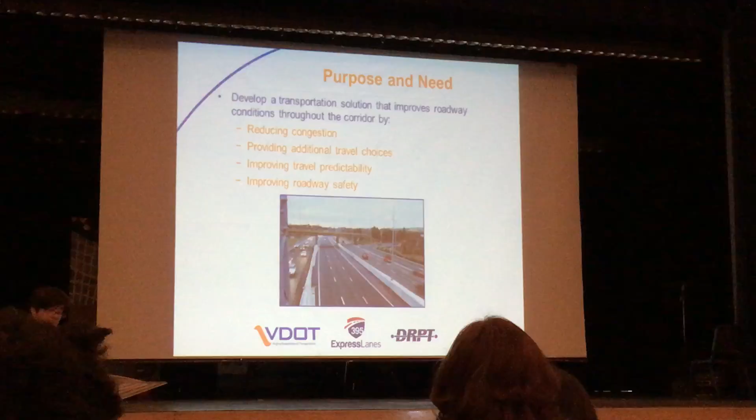Access and capacity, and our goal really is to move more people in the corridor. The purpose and need of the project is to come up with and develop a transportation solution that will improve the conditions throughout the corridor by reducing congestion, adding additional travel choices, improving travel predictability, and improving roadway safety.

To give you a little feel for the background of the project, this is following a comprehensive agreement signed between the Virginia Department of Transportation and 95 Express Lanes, sometimes known as Transurban. They're part of that partnership, and that allowed construction of the 95 express lanes out there today, 29 miles of express lanes.

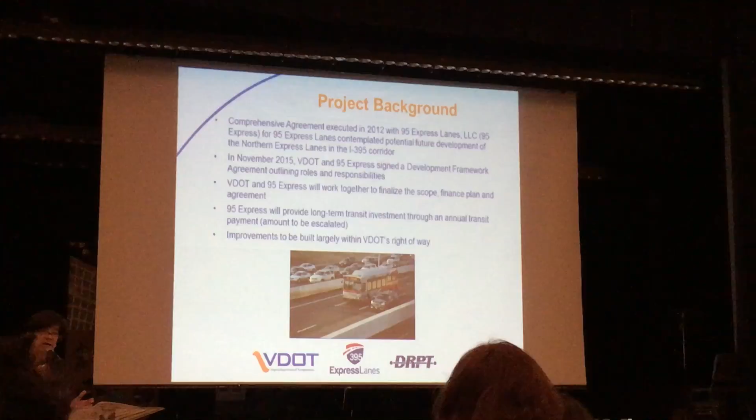That comprehensive agreement also contemplated a future extension of the express lanes north into the vicinity of the Eads Interchange. So last year in November of 2015, the Department of Transportation and 95 Express Lanes entered into a framework agreement. This outlines some broad understandings and talks about working together to finalize a scope of the project, a finance plan, and then a final agreement.

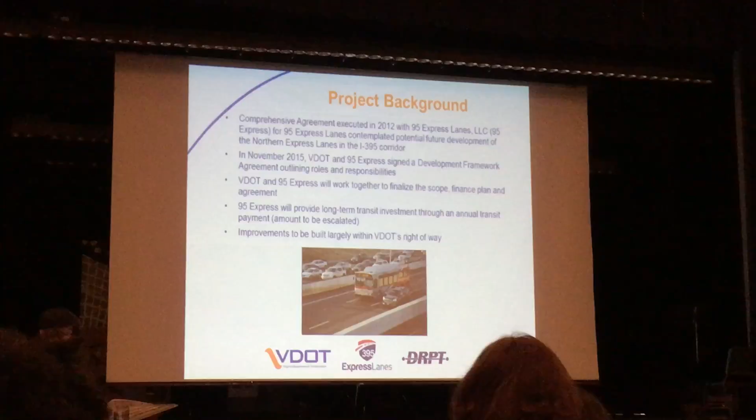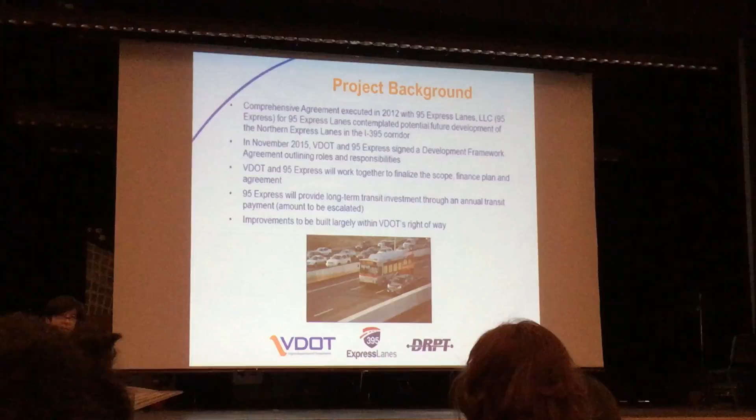One of the things in that framework agreement is a commitment to provide a long-term transit investment, through an annual transit payment that would be escalated annually throughout the whole term of the 95 Express Lanes contract. That term, when originally signed, was about 73 years, so from the time this project is implemented, those transit payments will be made for about a 70-year term.

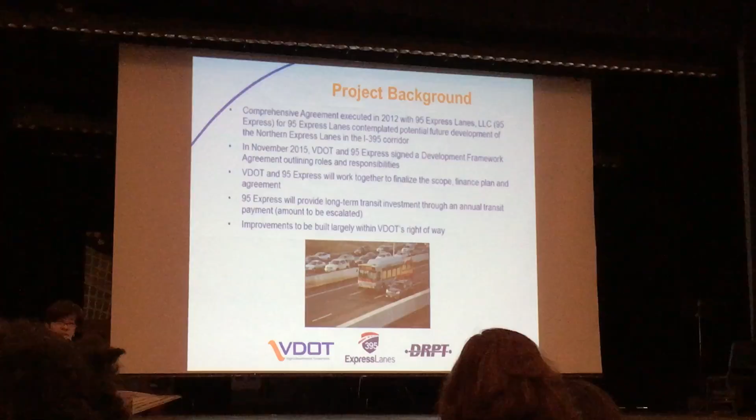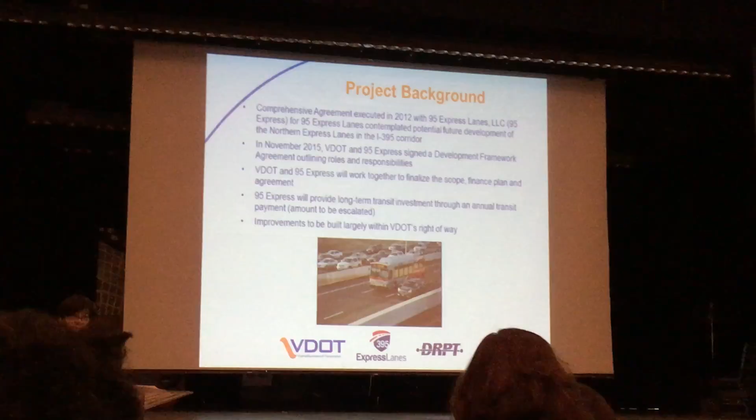The improvements proposed are largely going to be built within the existing right-of-way, mostly confined to the area where the HOV lanes operate today within the broader 395 corridor. The project scope is to expand and convert the existing 2 HOV lanes to 3 lanes, converting them from HOV to what we call HOT, or high occupancy toll lanes.

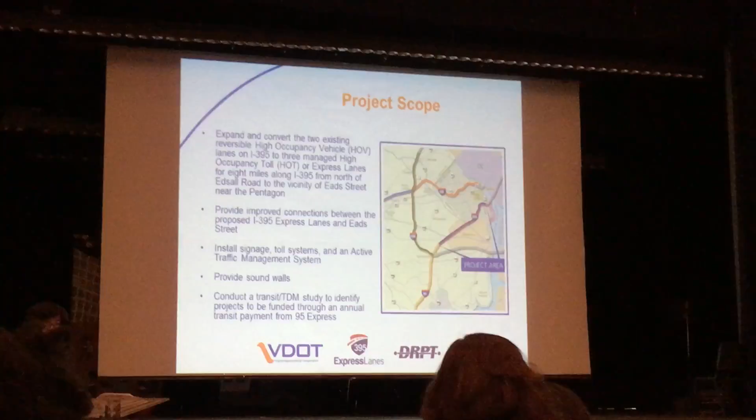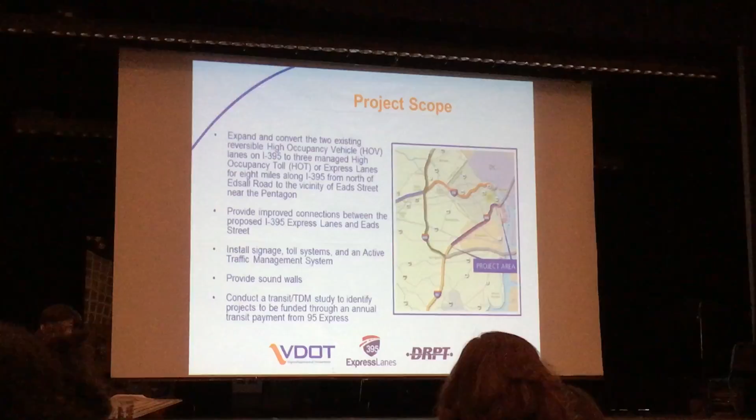Similar to the 95 express lanes, these tolls will apply throughout the day whenever the lanes are operated, with variable pricing so that speed limits are maintained to ensure free travel flow for those on the lanes and for buses, transit, and HOV drivers.

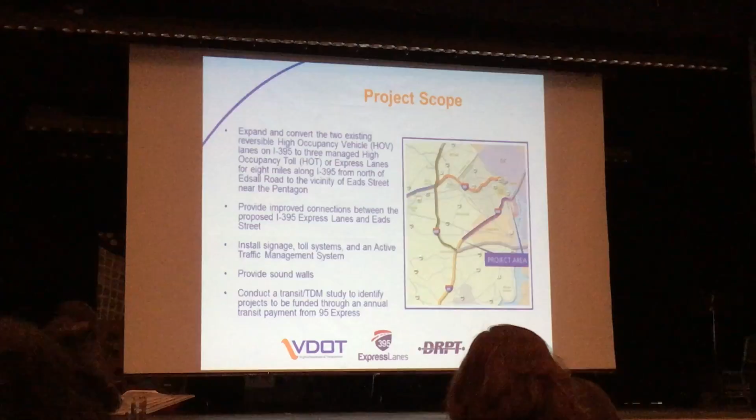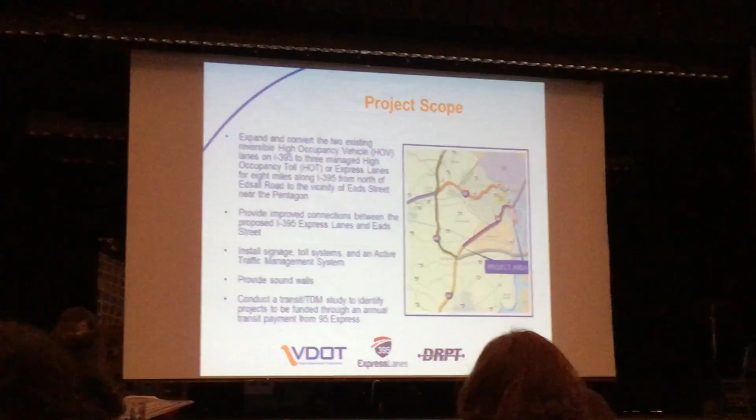We'll also be looking at improving the connections at Eads Street, which has been a focus of the team so far. We'll be installing signage related to the tolling, and there will be an active traffic management system with dynamic message boards to help with safety and advise motorists of conditions on the roadway.

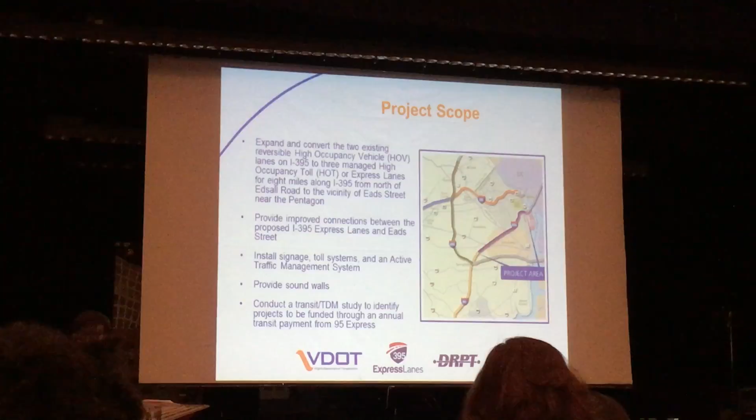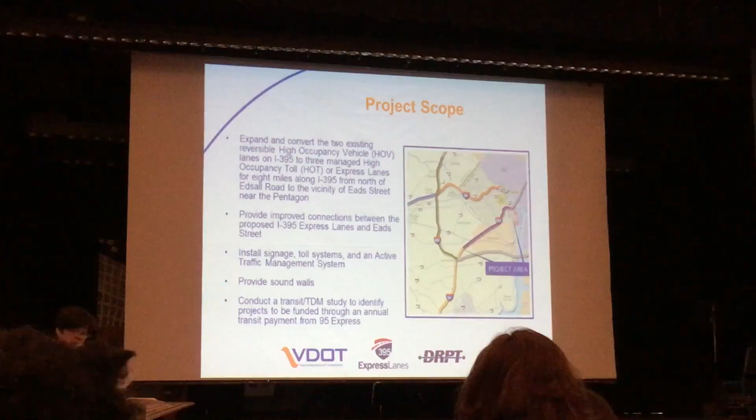Sound walls are another part of our environmental assessment, looking at noise impacts in the corridor. Based on our earlier studies, we anticipate a number of sound walls will be considered during preliminary and final design. We'll also be doing a transit and traffic demand management study throughout this year to identify projects eligible to use funding from the toll payments.

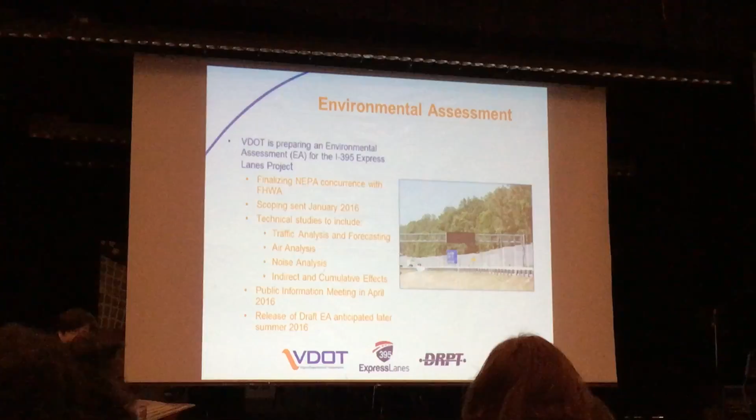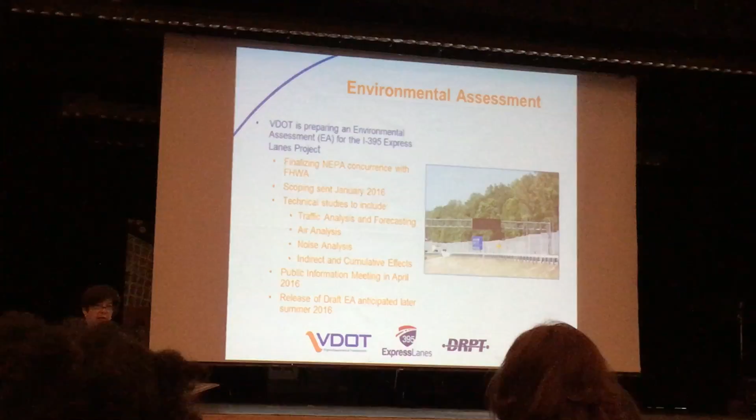We're working on initiating an environmental assessment. FHWA is our federal partner, and they've agreed that's the level of document we're moving forward with. We sent out scoping letters, advising all of our coordinating agencies about the scope of the project.

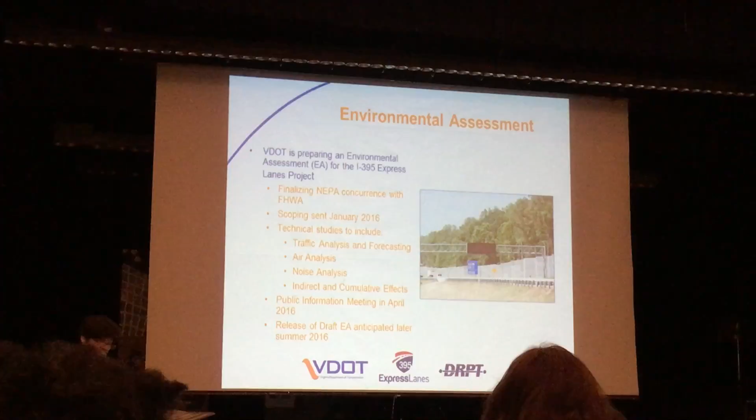We've started to initiate our technical studies looking at traffic. That traffic data will inform our air analysis, our noise analysis, and then we'll be looking at all the other environmental impacts along the corridor in addition to those.

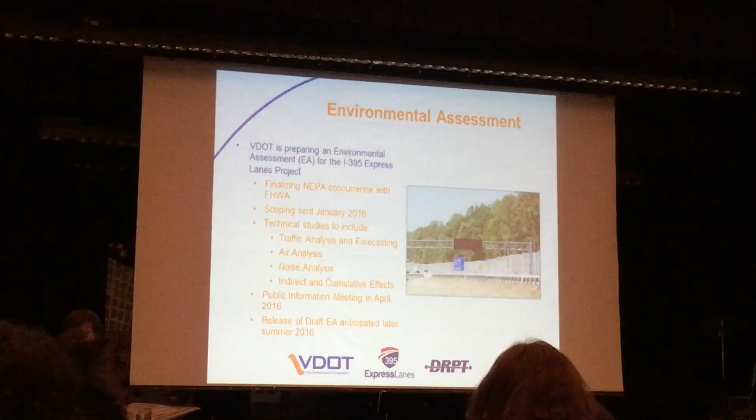We have our public information meeting tonight, and we had one on Monday night. We're anticipating a draft environmental assessment available for the public to review and comment on in August of this year.

One thing in this area of the corridor is there's quite a bit of double-faced guardrail. That will all be converted to a concrete barrier, which is a safer, more effective separation between the two systems.

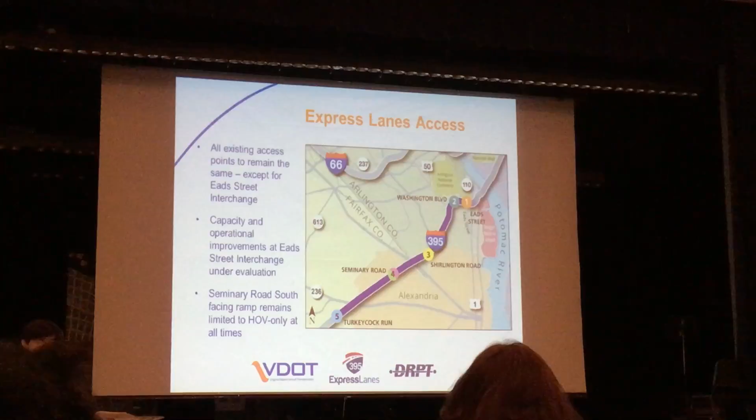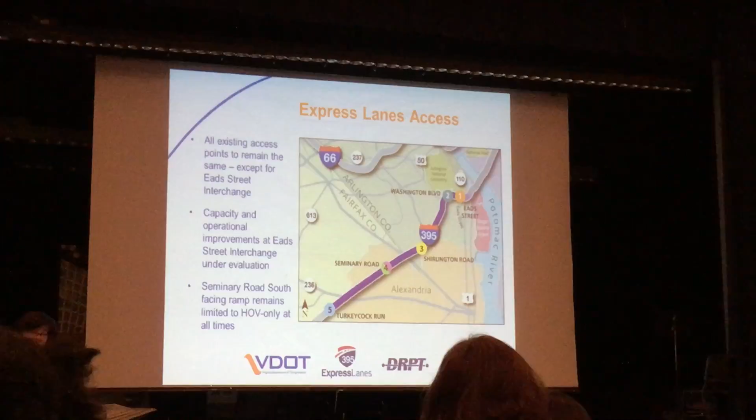In terms of express lanes access, once the system is converted to HOT, all of the places where you currently access the HOV lanes will be converted to HOT access. There will be toll gantries and signage about what the tolls would be, and those access points won't really be changed other than being converted, with added signage.

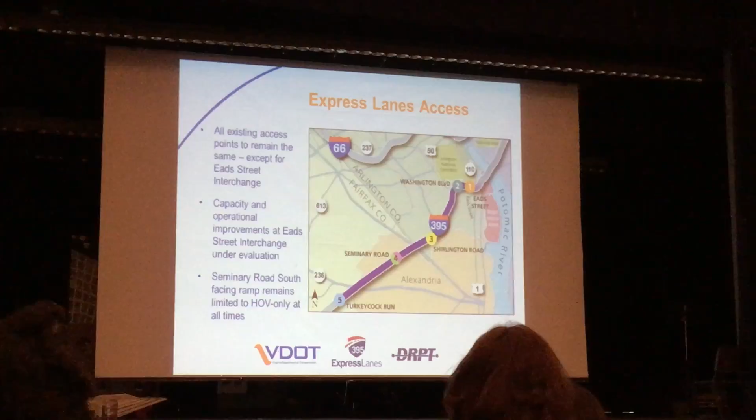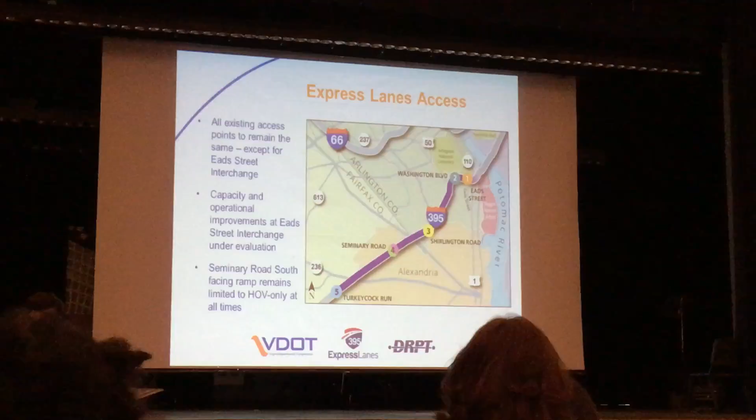The one place that is not true is at the new ramp that just opened in January. That ramp comes from the south and allows people to exit the HOV lanes at Seminary Road. That ramp will remain HOV and transit use at all times, so even in off-peak periods, to access that ramp you would need to be HOV3 or in a bus or van pool.

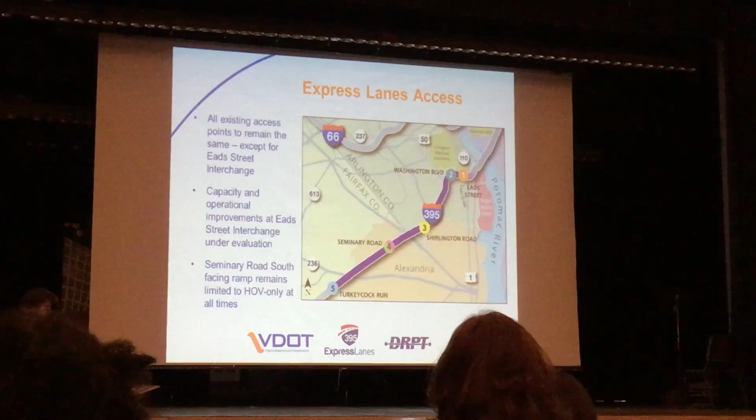These maps are at the back, and I would encourage you to go look at them, especially if there's a specific area of interest. We have people at the back who can answer questions. I'm just going to walk through these fairly quickly now.

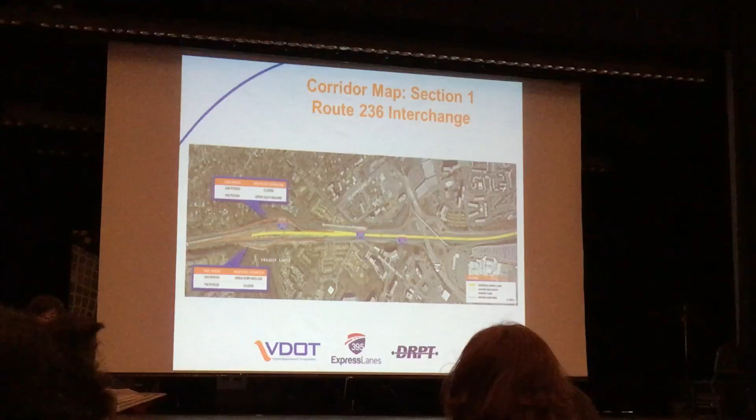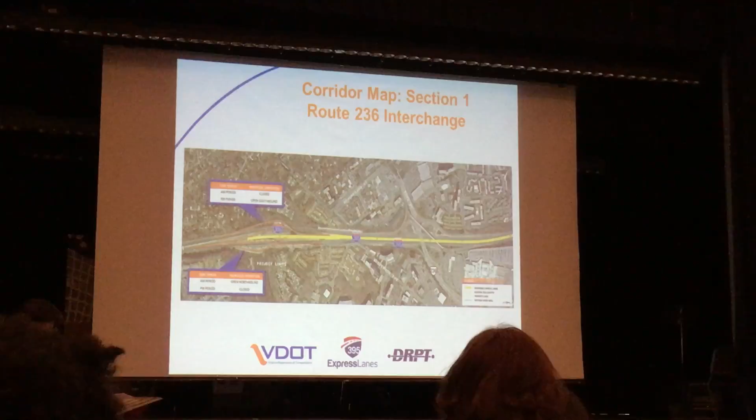I know you can't really see the detail, but just to give a broad overview of the project, starting from the south and moving north. Here you can see the Duke Street interchange. In this area, there's really no change to the HOV to HOT access other than just converting it at this location.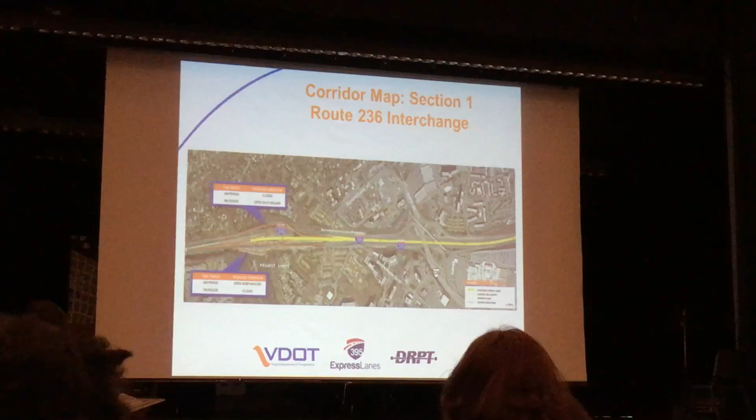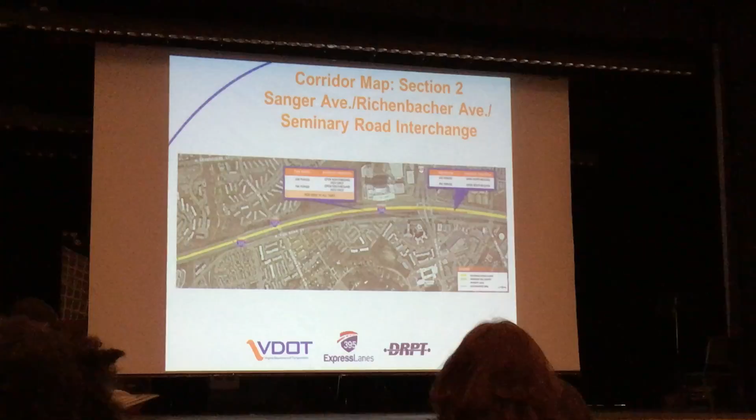This map shows the Seminary Interchange, which is where we are today, or close by. As mentioned, the ramps going to and from DC will convert to HOT, but the ramp at Seminary would remain HOV.

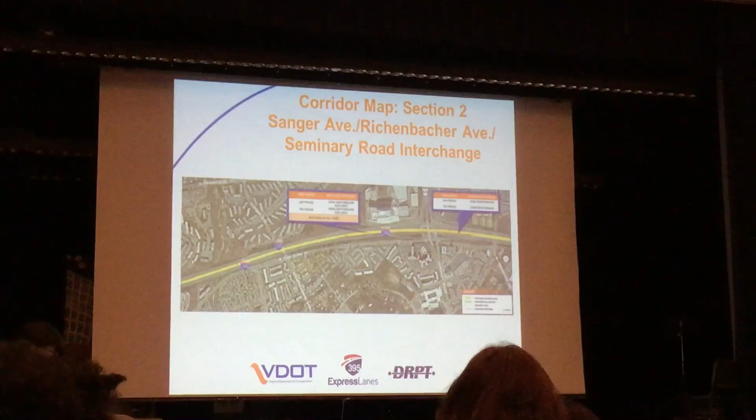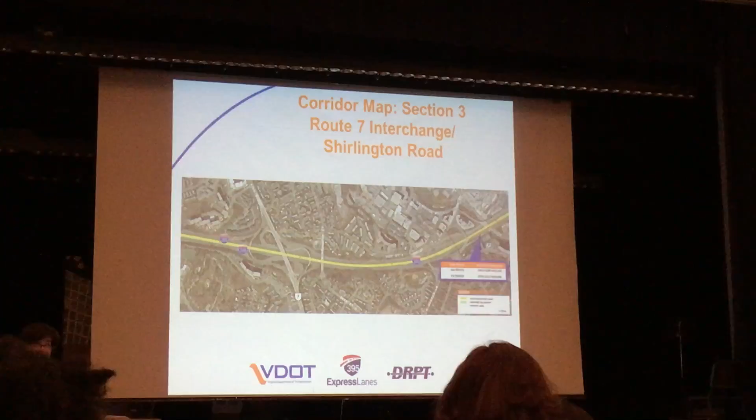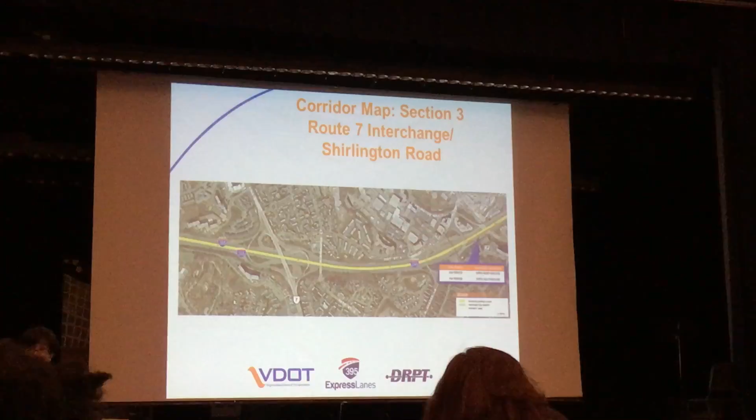This shows Route 7 and then Shirlington. You might recall back in the 2009 to 2011 time period, when this project was being studied previously, there was a lot of discussion around the Shirlington Interchange and adding new access here. It was a very controversial, much discussed access point. We are not proposing any change—there will not be new access at this interchange. That's one of the big differences from what you might have seen previously if you were involved in that discussion back then.

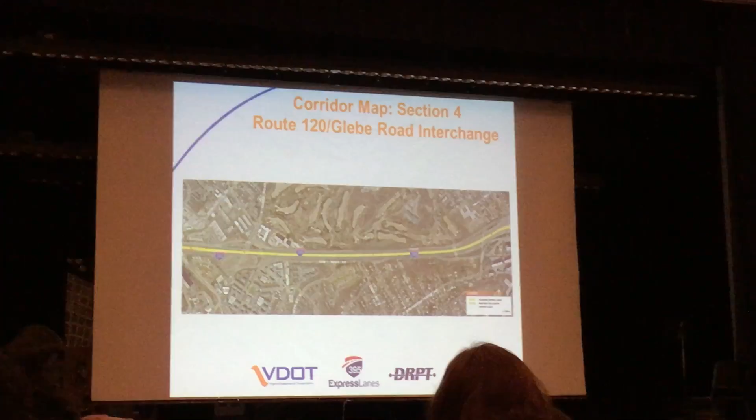And here we see Glebe Road. Again, no changes here. Then we get to the Pentagon and the Eads Street interchange.

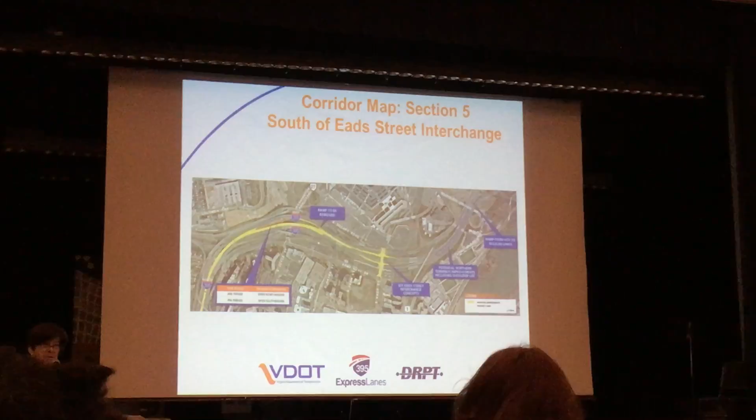We are rolling this out tonight—we did this Monday night as well. This is kind of the first time we're showing the public some of our thoughts about what could happen at the Eads Street interchange and what we think would be an improvement.

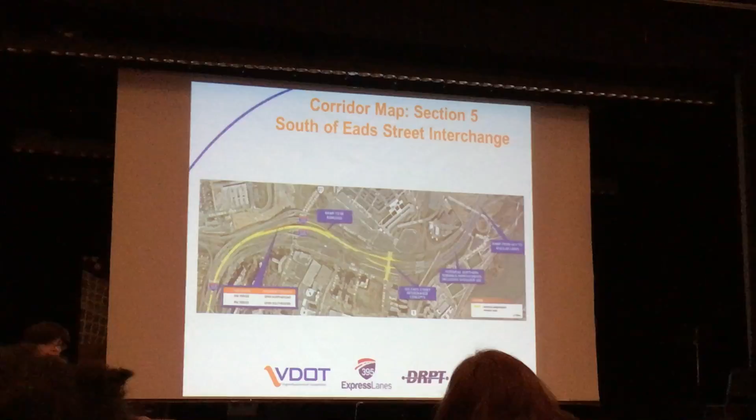Basically, we're looking at trying to maximize the use of the existing ramps that are already there today by reversing some of the movements during the peak periods. Today, this ramp that I'm pointing to is a reversible, or one-way ramp that always functions in the southbound direction.

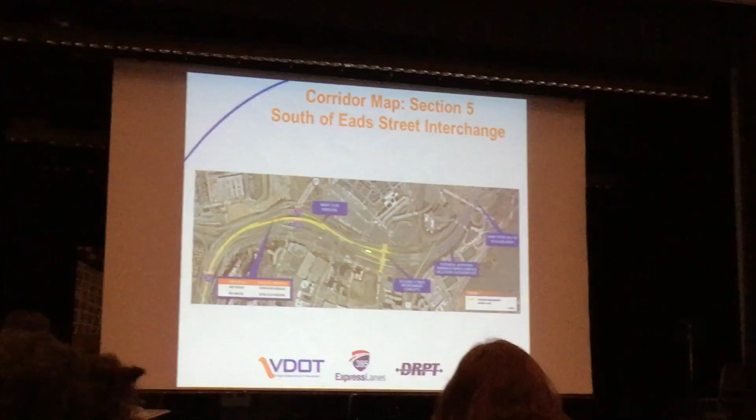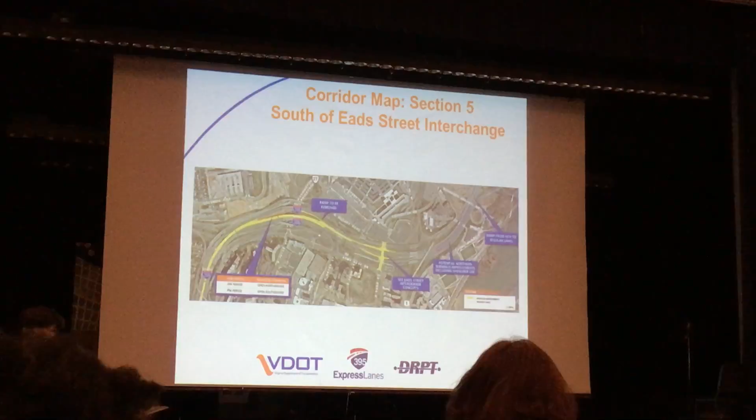What we're talking about doing is shifting the point where the system changes from reversible to both-way. We're going to shift that to the north and make use of that ramp in the PM peak period and in the AM peak period to reverse that direction.

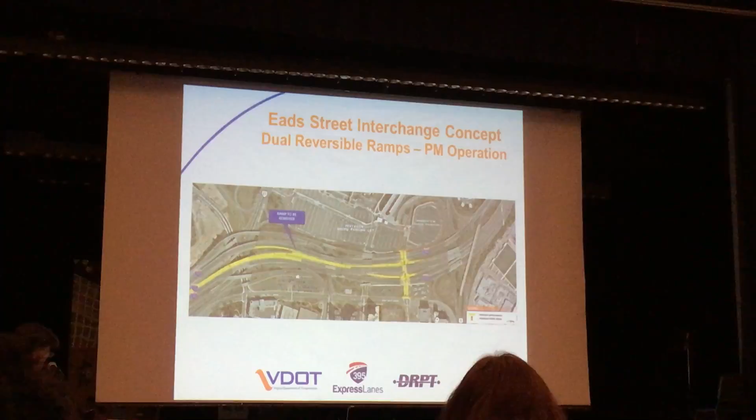This just shows the PM operation, and there's another slide that shows the operation in the evening. I would point out also at this location that one of the keys to all of this is that the Pentagon Reservation is a very key area for transit in the corridor.

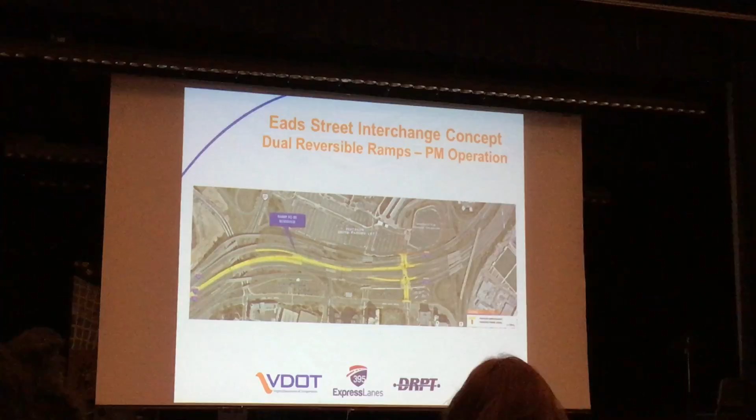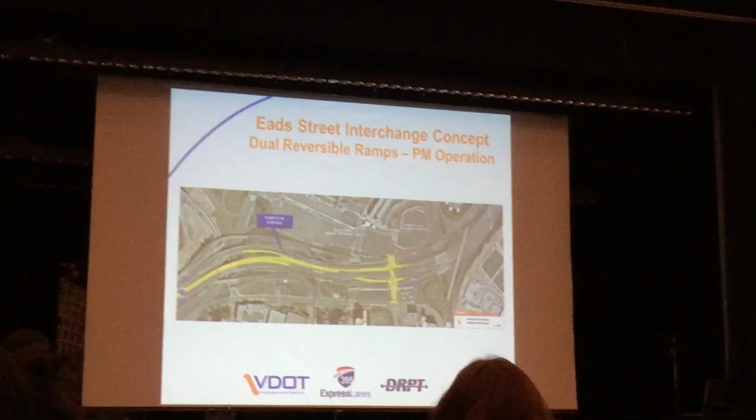There are many buses, carpools, and van pools getting into that area to access the metro station on the Pentagon property. So we've been coordinating very closely with the Pentagon, also working with our partners at Arlington County and others, to talk about what kind of changes might be needed to make this whole area function better.

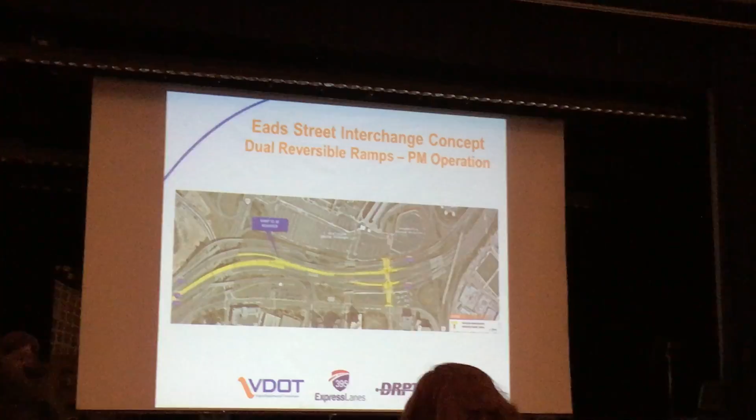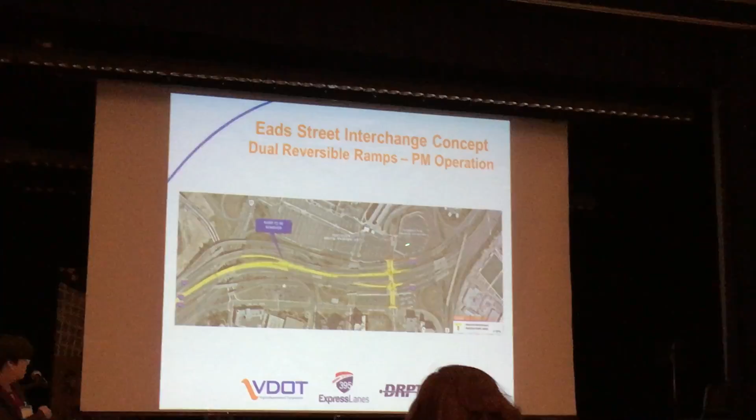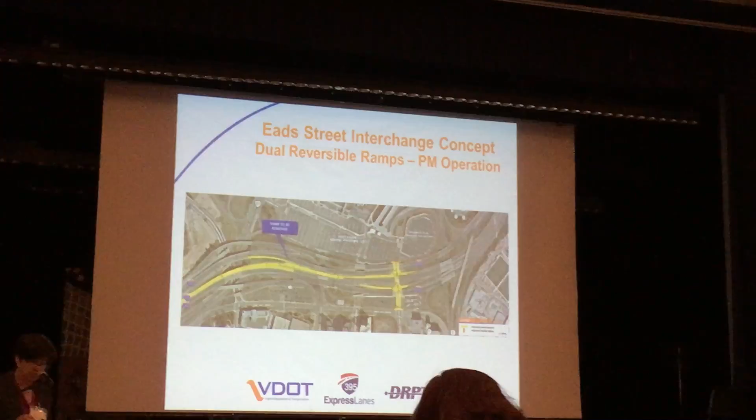Some of those include adjustments to traffic circulation and traffic on the Pentagon property. We've been working closely with them, and you can see in these slides that we are proposing a series of coordinated traffic signals, adjusting traffic flow to help both buses and carpoolers get in and out of that area more easily than they do today. The hope is that this would free up much-needed capacity on 395.

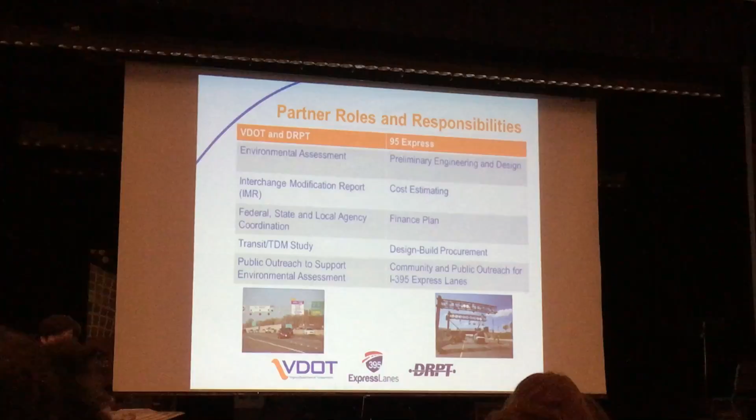One thing to talk about in the framework agreement: there are responsibilities on the public side of the fence, so to speak, and other responsibilities that the 95 Express teams will have. On the left here, you can see VDOT and DRPT responsibilities.

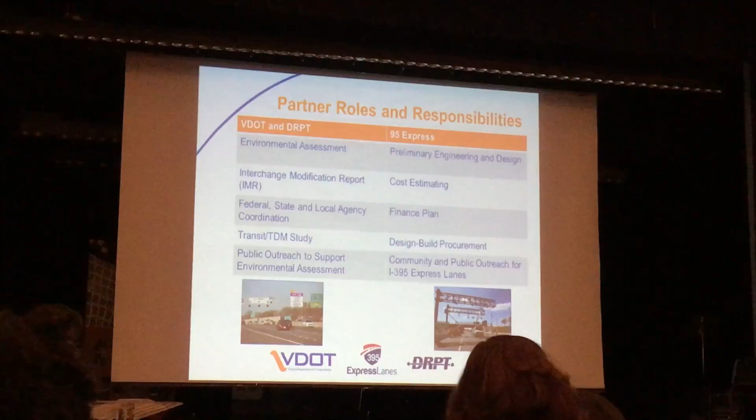We are working on the environmental assessment, which is an effort that we are leading. We are also working on the interchange modification report, which is basically a summary of all the traffic impacts of doing the project. We look at both how traffic will flow on 395, as well as areas to the north and south of our proposed improvements.

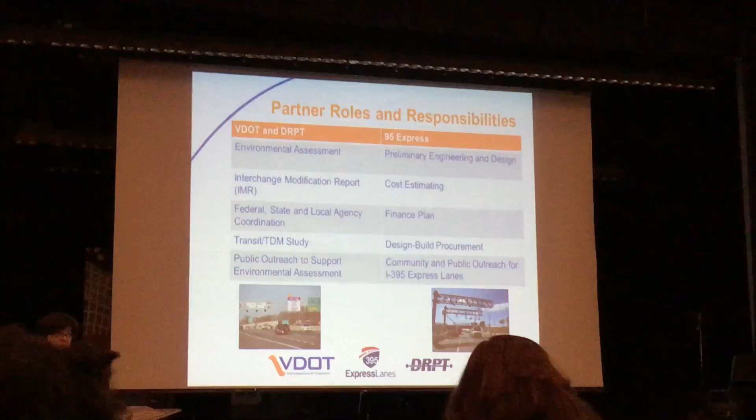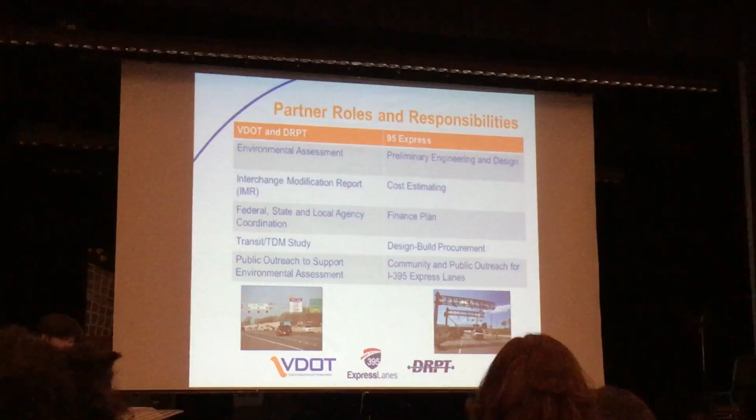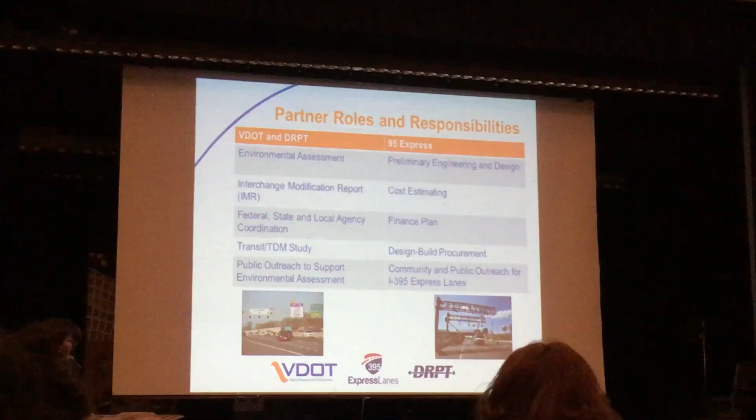And then we also look at the surrounding roadway networks to understand how those might be impacted by the project. We're also coordinating with federal, state, and local agencies. We're doing the transit study, and our role, like it is here tonight, is to do public outreach to make sure the public has an opportunity to provide input, understand what the project is about, and make sure your voice is heard in the project development.

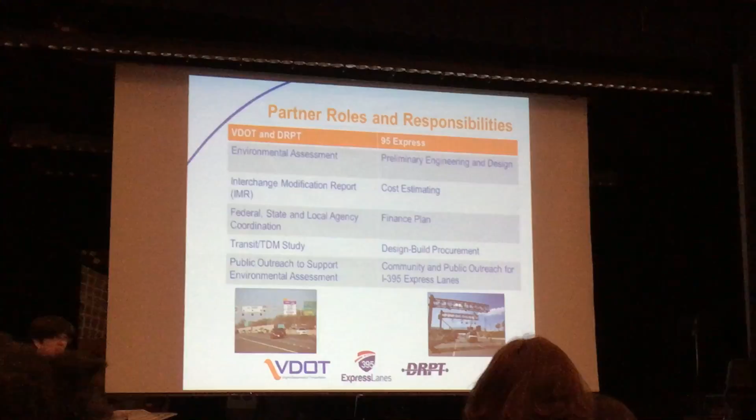95 Express partners are responsible for preliminary engineering and design. They're also doing cost estimating for the project, and the department is doing our own independent estimate as well. We don't just take their word for it; we look and compare with our own costs.

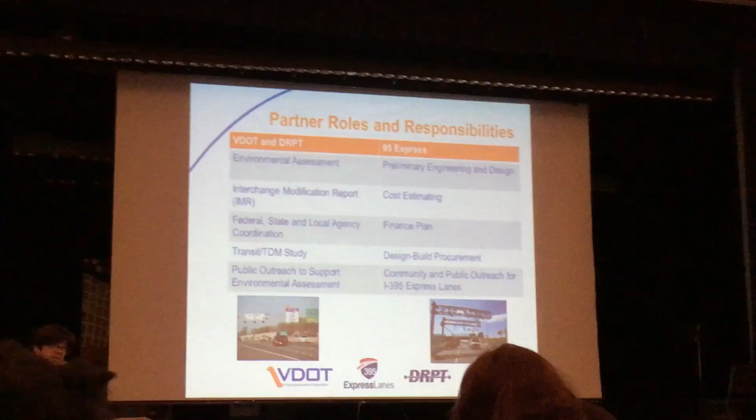They will be responsible to come up with a finance plan, meaning how to pay for the design, construction, and implementation of the whole project. They will also be doing a design-build procurement, hiring a contractor responsible for design and construction of the project. And then they also are responsible for community outreach.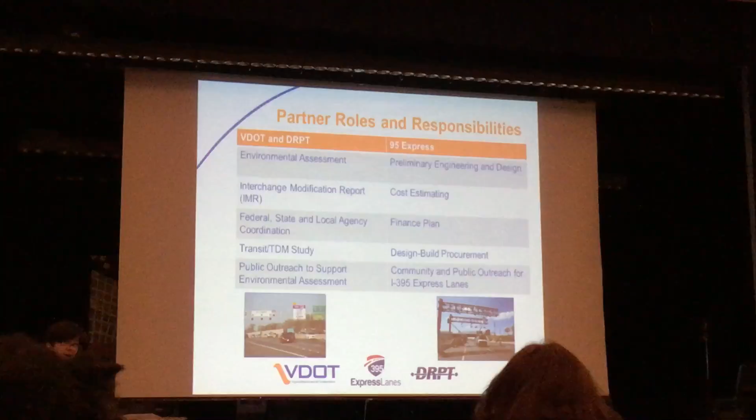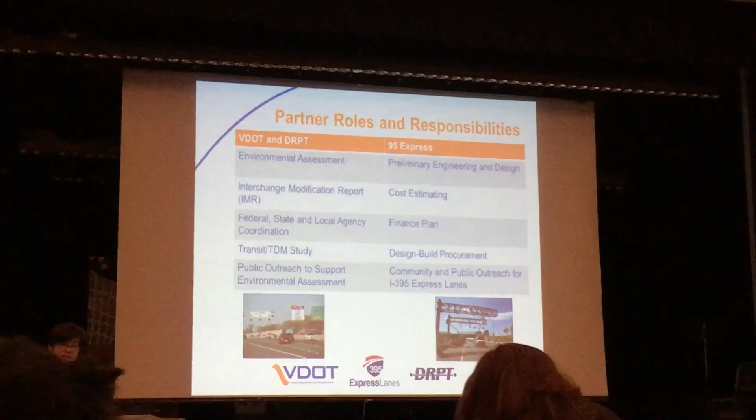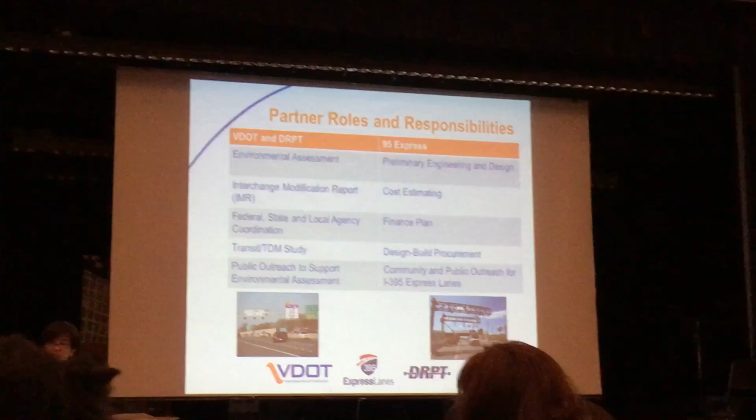Their outreach is a little bit different, focused on educating the public about how to use the lanes and what the rules of the road are once they're converted to express lanes. So they have a different role, but we go hand in hand. We've been joining 95 Express as they've been out to meet HOAs and respond to questions at those meetings. So it's a joint effort.

So now I'd like to invite Tim Rosenman to come up and talk a little bit about the transit study.

Okay, thank you, Susan. As Susan said, my name is Tim Rosenman. I'm with the Department of Rail and Public Transportation. We're a sister agency to VDOT. We exist under the Commonwealth Transportation Board, and we provide capital and operating funding to the local bus systems in Virginia as well as to Metro. We provide funding for commuter assistance programs run by local governments, and we also support the state-funded Amtrak service as well as freight rail.

So our role on this project is to lead a transit TDM study. But before I get to that, it's worth noting Susan showed a map of what will eventually be the regional express network that now includes I-95 and I-495, I-66 both inside and outside the Beltway, and I-395 — this project is being added to that network. For each of those projects, it is a principle of the Commonwealth and this administration to add guaranteed funding for multimodal solutions as part of those projects.

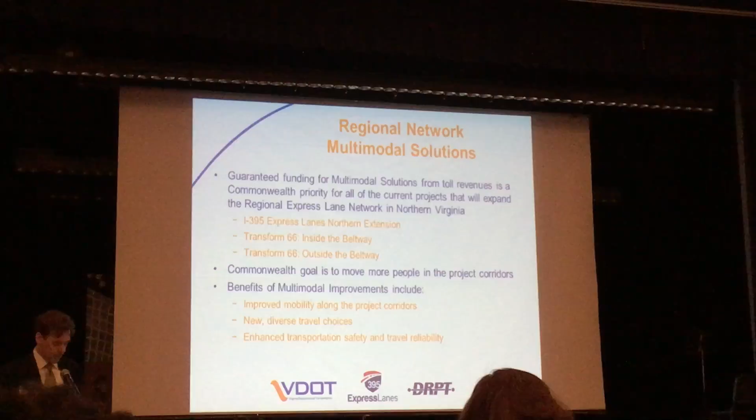The exact mechanism is a little different for each project, but it's something the Commonwealth has committed to. Our goal is to move more people in the project corridors, and the benefits of the multimodal program include improved mobility, new diverse travel choices, and enhanced transportation safety and travel reliability.

As far as the I-95/395 transit funding is concerned, it is a guaranteed annual payment that will come from the toll revenues. The amount of the payment has not been determined yet — that's subject to negotiation between the Commonwealth and the 95 Express partners. There are traffic and revenue studies currently ongoing that will inform the annual transit payment.

DRPT is leading a transit and TDM, or transportation demand management, study. It includes the city of Alexandria, Arlington County, Fairfax County, Prince William County, and Stafford County — all jurisdictions in which the actual corridor lies. There's a short extension of the 95 Express lanes proposed for Stafford County. It also includes two regional transit organizations, the Northern Virginia Transportation Commission and the Potomac and Rappahannock Transportation Commission, and we've added the Virginia Railway Express to the key stakeholder group as well.

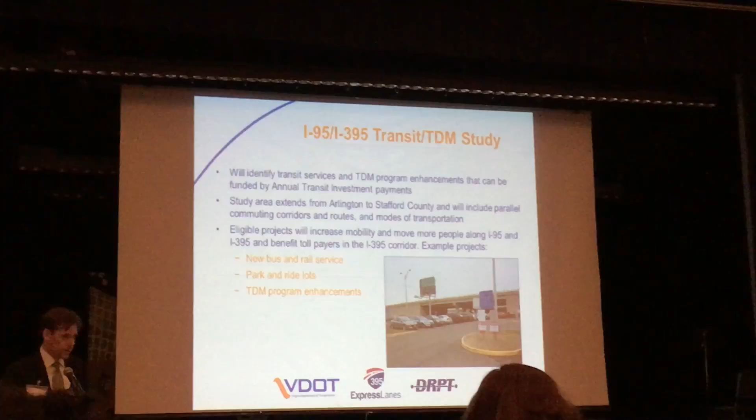The study area includes Arlington County. The northern limit of the study area is the Arlington County Pentagon Interchange, and it extends all the way to Stafford County, where a short extension of the express lanes is proposed.

The project will end up coming up with a program of eligible projects, which could include new bus service, park and ride lots, and TDM program enhancements.

My last slide is just an update on where we are in the study. DRPT issued the task order last Monday, about nine days ago. We had a kickoff meeting that included all those jurisdictions from the previous slides. The city of Alexandria was well represented at the staff level.

We're committing to two to three rounds of public meetings, and we are committed to having a draft report for people's comments in November, which will go into a final report in December, informing the procurement of the project. So at this point I'm turning it back over to Susan, and we're going to open it up for questions.

Okay, thanks, Tim. So public outreach to date, we've been out with a number of key stakeholders. The Pentagon, we've had quite a number of meetings with them. I would also note that we have coordinated with the District of Columbia and their Department of Transportation.

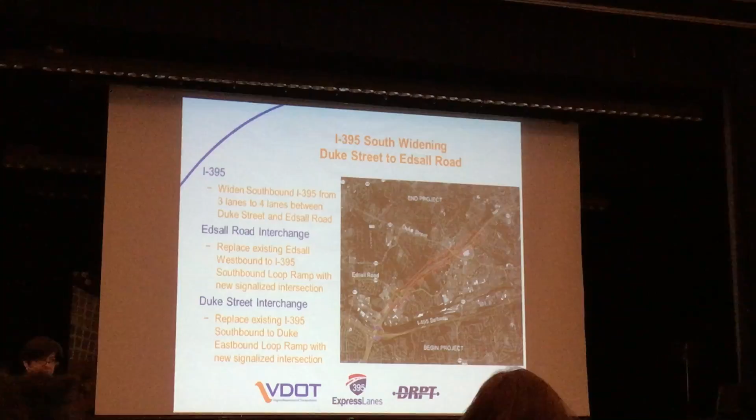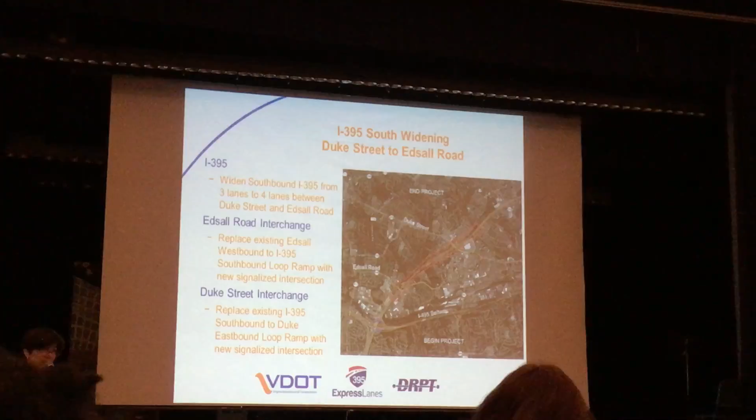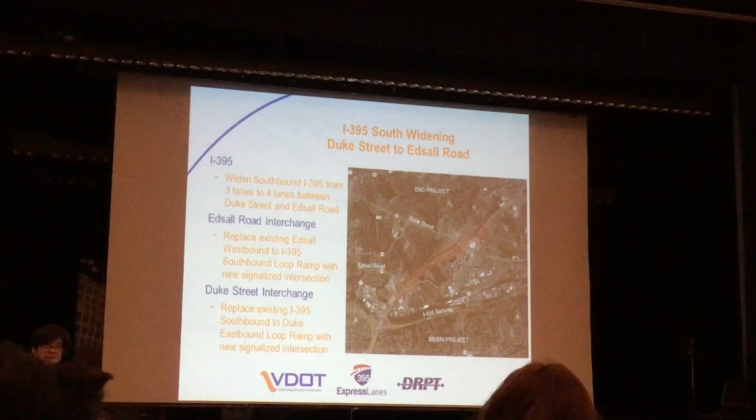I wanted to talk a little about a sister project that's also underway at this time. We have a public hearing tomorrow night on this project, our 395 southbound widening project between Duke Street and Edsall Road. This is to widen from 3 to 4 lanes—there's a short section where you lose a lane, and it's a consistent congestion issue.

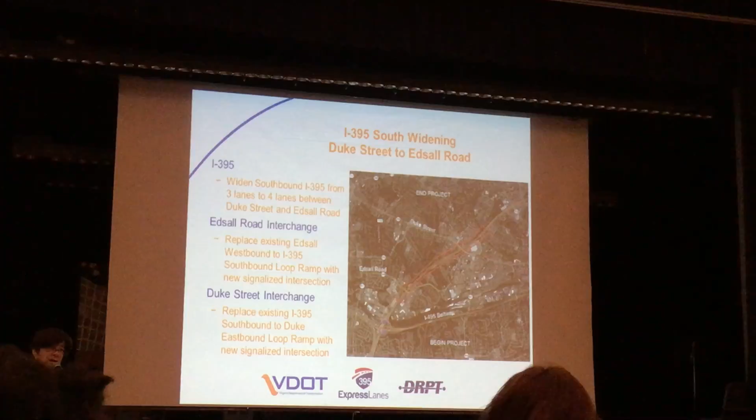So we are looking at trying to implement both projects concurrently. We're talking with Transurban about how we might accomplish that. Right now there's no funding identified, and we're still in discussions about how that might happen, but that is our goal, since there's a lot of benefit to having both projects occur at the same time.

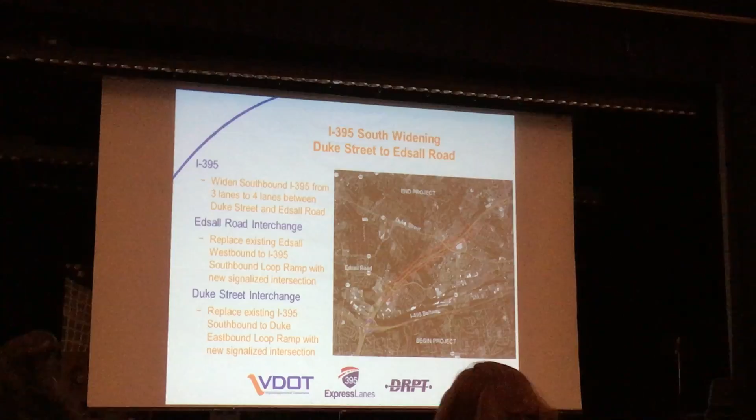They share a barrier separation, so it would be easier in terms of managing lane closures and coordination between contractors if it's all done under the same contract. That's our goal, and we're working on how to implement that.

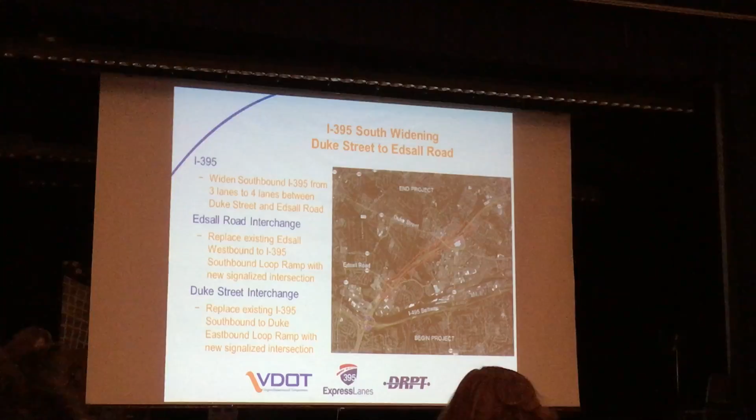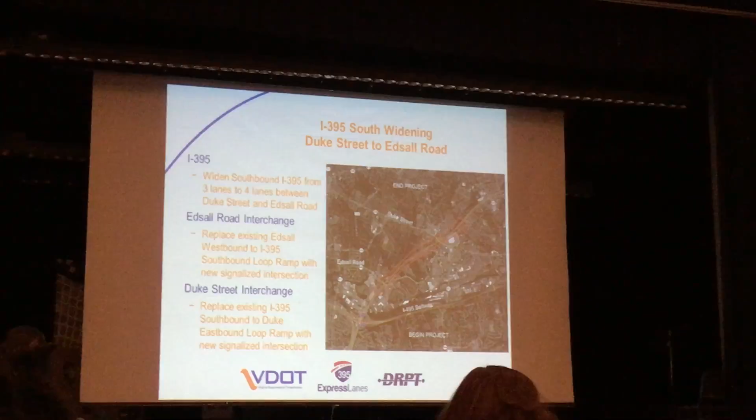We do have Calvin Britt at the back of the room, our VDOT project manager, and he's here if you have any questions about that project. For any of you going tomorrow night, we will also have a presence from this project at that meeting to answer any questions that might come up.

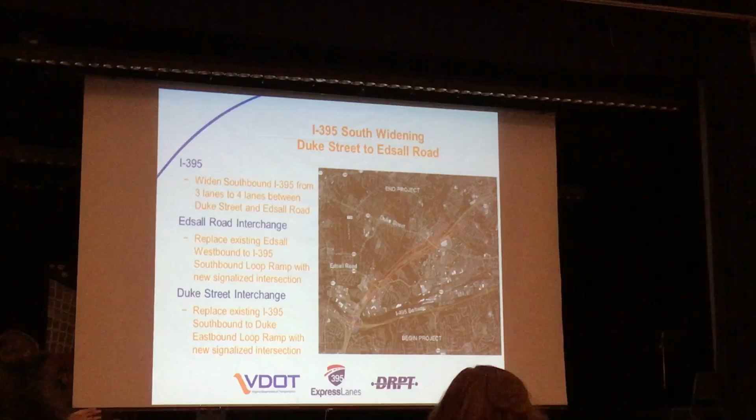So I've talked a little about how you can provide input—certainly written comments, or comments through the court reporter. Email comments are fine. We do put a date on receiving comments, but I want to make clear that the door is open, and if you have comments as the project progresses, we still want to hear them. We want to keep the door open in terms of communication.

This is just so we can summarize the comments received as part of this public information meeting. This talks about our upcoming meetings, of which now there's only one left since we're at the second one tonight. So we have Bryn Mawr Park Elementary School tomorrow night for the 395 widening project.